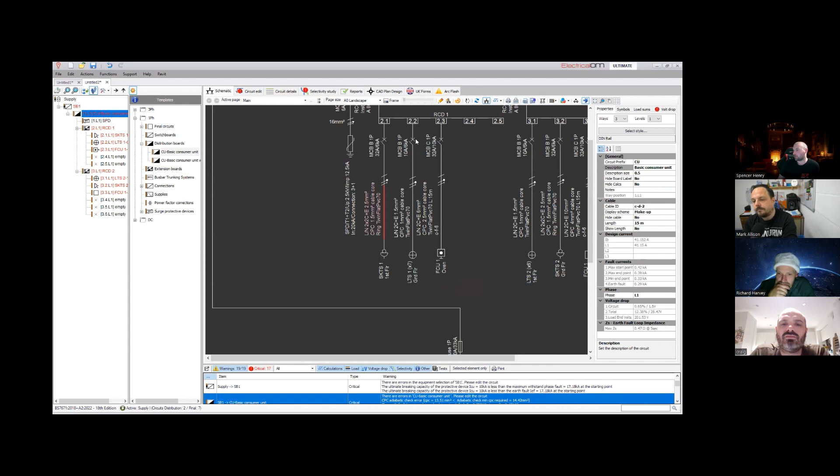So here's one I made earlier. I've added in a fuse board. It's got a fuse on there. I've got some ways, a split load board. You can see the two sides of the RCDs, those sorts of things. So you can pre-build lots of elements which are very common, and you can save those in the software and recall them anytime. So if you do common things like certain lighting circuits with certain types of cable, those sorts of details, we can add them in there.

That's really useful for us when we're adding solar PV onto systems, because sometimes they're going into additional consumer units rather than replacing the whole house one. So you can model that at a simple domestic level. That's a really good feature, actually. I wasn't aware you could do that, so that's news to me.

Yeah, there's lots of little things that are in there. I'm building at the moment a load of pre-made templates which are going to show up in the future. Basically, it'll be things like simple socket outlets, lighting, the most common installation methods you see out there for various types of location. There'll be some pre-built elements you can take and drop in quite quickly and place those details as you go.

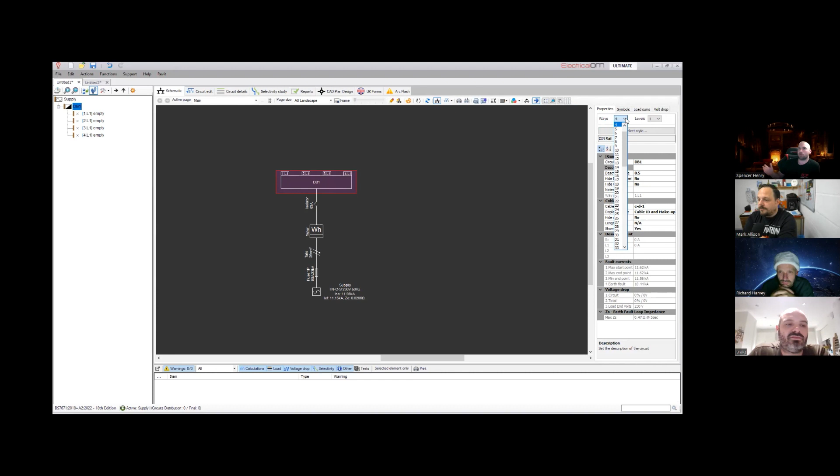So here I've got my board. Generally, if you're doing a board swap now, most properties, what are we looking at? Sort of 8, 12 way? 12 to 16 ways is typical. I think they're getting ever bigger. Let's put 12 in there. So I've added in 12 ways here.

Now it's saying currently L1, because on my supply it is just identified as L1. That's pretty standard. You might not know that information, to be honest. Leaving it as L1 or L2, whichever of the phases you want, on a single phase system it's not really going to affect much on our design. If you're looking at more modern properties being built now, generally they'll have 3-phase boards. It's becoming quite common, isn't it? With all the smart technology, but maybe that's for another day.

It's one of those where we're kind of between two places, aren't we? I think we're hoping PV and battery storage are going to save us from needing to go 3-phase in everyone's house. But we just had a property in a nearby town. They've got a 3-phase supply put in, domestic house. Yeah, I remember seeing a few things on LinkedIn. The guys over at eFix did a few videos where they were going into properties where these were going in. So it is happening out there.

It's all about this battery storage and prosumer and these sorts of things. We won't touch on that today, but we have already preempted a whole prosumer element going into here, which you're going to see coming next year. There's some real magic going on in there.

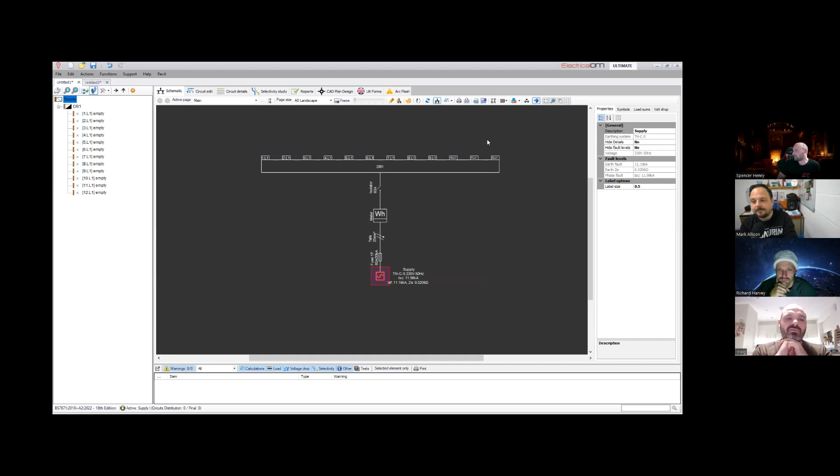Awesome. But here, I've got various things. So here I've got a basic isolator on the incomer. All these elements can be adjusted as we go. So for instance, this is a standard, probably going to be an 80 amp main fuse. And then you've got different AC types here in terms of the type of isolation. If you don't know what they are, we've got lots of really good information already pre-built in here.

So for instance, for this information icon here, we've gone into the standards. We've identified what they are and what they're being used for. So you can then make a judgment on what you need without having to go to a different standard all the time and pick out all this various information, keeping things as simple and concise as possible. So if you come across something you're not so sure about, you've got a reference to where you need to go to find that detail.

So I think this is part of that. It's only as good as what you get out, because if you start speccing the wrong things, that's what your guys are going to be ordering up and installing on site. And at the minute, there's no warnings on this, there's no errors. What you've done is not against regs, but you might be speccing the wrong equipment for your job on site if you're not looking at the right points. Yeah, exactly that.

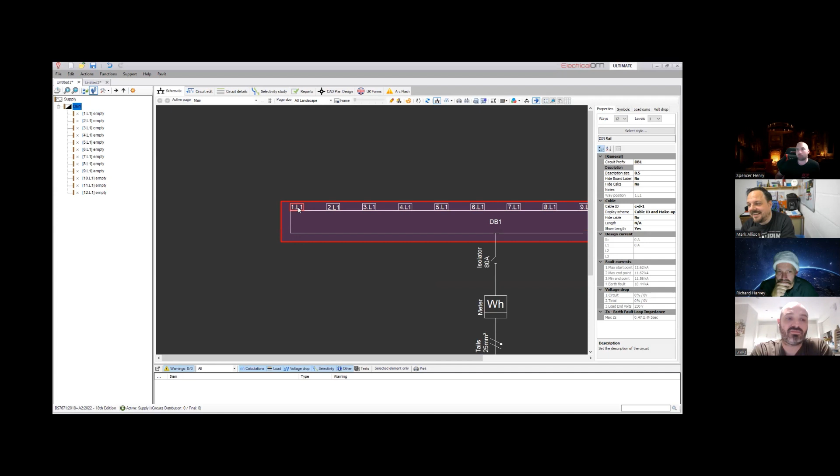So generally now, I'm going to go back to here. Often I think a lot of the first ways on the board now are taken up by SPDs, in anything modern. Yeah, that's fair. So again, just simple. You go in, drop an overvoltage protection in here. As you can see, it's just dropped an SPD on there.

I can tell it what the way is. I can add information around the cable. And again, this is all referencing stuff back to the regulations. So depending on the type, I'm assuming it's T1, T2 type for most domestic as a standard there. So we have pre-programmed some of the basic go-to points for these sorts of things. But it also spits out information relevant to particular types.

So if I select a cable like 2.5 with a 2.5, you see here it's going to pop in the fact that there's certain regulations that say actually you've undersized this. Go back, have a relook at it, and your warnings are popping up there. So everything is very much an interactive element. Every time you make a change, the software's going to tell you what's going on. Look at the calculations going through there. So I've added some details there.

And I pop this 6 amp MCB in there. Now, if I go to devices here, you can see I've got a 10kA device here, but it's telling me about 11kA here. And depending on the system that you're working on, that's going to make quite a big difference in terms of the size of devices, maybe even the manufacturer of devices that you're going to be selecting for that particular installation.

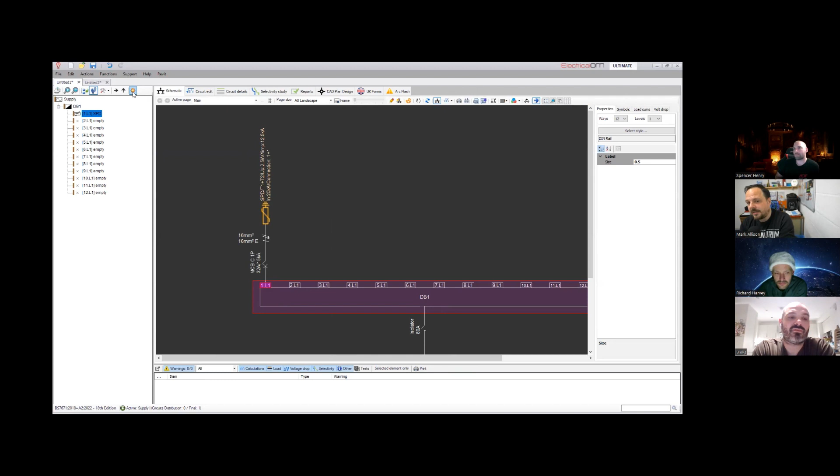Yeah, it's going to be bespoke to the area of industry you work in, isn't it? The templates, so it's totally different for everybody, really. Yeah. Something totally different that you would fit, maybe in the main intake of a hospital, than it would be for your domestic installation. So yeah, absolutely.

So we've got our SPD in there, and I can start dropping in circuits. I might start with something which we're all probably familiar with. I'm going to go for a final circuit here, and I'm going to make this something like a ring final circuit. Yeah, the good old ring final, love it. Good old ring final circuit.

And we could have that whole debate about whether or not it's needed these days. Is it valid? I'm in the camp of we really don't need them in domestic installations anymore, but that's a whole other can of worms for another day.

But rings are quite common. So here I'm going to drop in, and you can select for different kinds of circuit here. And depending on what we select here, it's going to affect how the software is behaving for its calculations. So when I do select a ring final circuit, all of my calculations are going to be based on a ring. You can see it's popped up this little bit of additional information here based upon the fact that this is now a ring final circuit.

And the software is also going to throw up a plethora of issues and errors because I've selected that to be a ring. You can see these little red warning markers popping up all over the place. So for instance, if I hover over this one, it's saying your phase conductor must have a CSA of 2.5 or 1.5 mm. That's the information we put in the software.

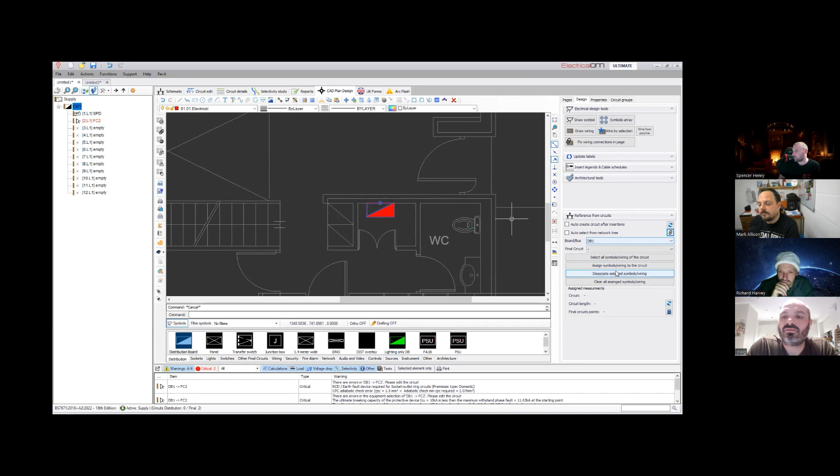So for instance, here, if I select this DB now, I'm going to say I want to link it with this DB1. I can assign it, and it will start adding references and details based upon what I've got selected in there. Now I'm going to drop in a new ring circuit on here. So I'm going to create a new circuit after dropping in.

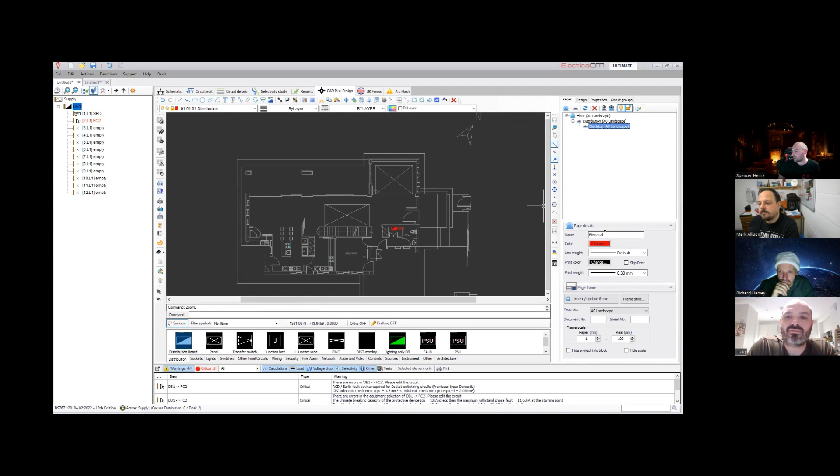I'm just going to give this a nice new CAD layer because we're in a CAD environment. So we're going to add it as a CAD. And I'm going to give it another color so we can see the differences on there. And the reason why I'm doing this is just to answer your question there, Craig, in terms of the lengths and how they calculate, because this is going to give us a nice visual representation of why we're calculating it in that way.

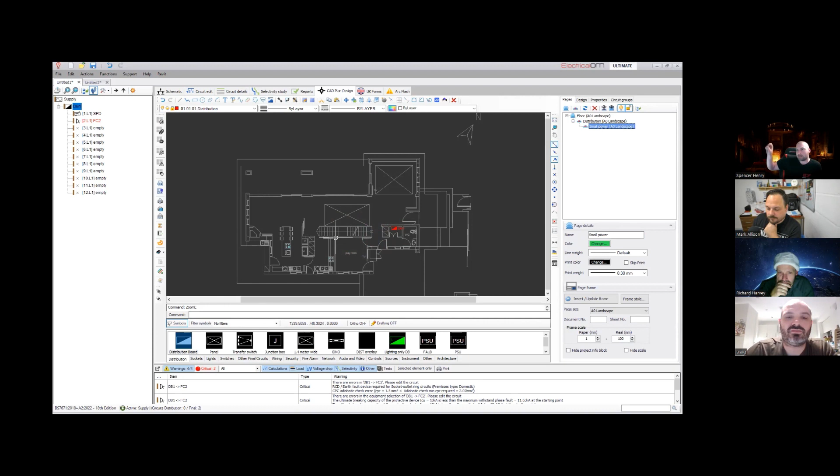So here, go to my sockets and grab a standard double socket outlet symbol here. And I can start dropping stuff around. I'm going to add in the wiring. And in this case, I can give the wiring things like an elevation. So when it goes up to the board, it goes down to my outlets. I can set the wiring, how high I want it to go. So for instance, in most domestic properties, floor to ceiling is usually about 2.75 meters, which I think is pretty standard for building. So I'm going to put in 2.75 in here.

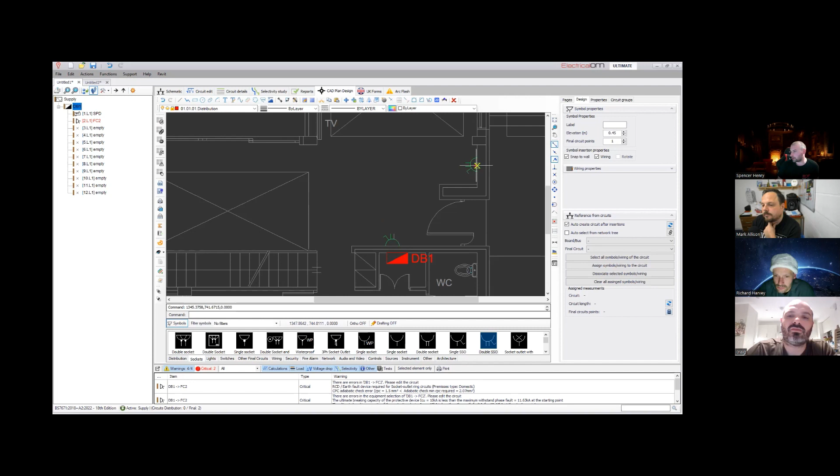So I've added that information. And on the symbol here, I've already put in the elevation. Currently, this is set at 400. It needs to be 450. So that's your standard socket height. And I can start dropping in things like sockets here on this drawing now. So for instance, we'll drop one here. It'll add the wires in as the crow flies. And it's just a simple drop in wherever I want to put a socket outlet. You see it's adding those wires as I go. So I'm just going to finish that off.

Give this one, let's call it SKTS 2, call it general power. And again, I'm going to leave it as a ring outlet. I can say how many watts per point. So depending on your location in the building or in a property, you're going to want to change this. So for instance, for something like a kitchen, 200 watts per point is probably a pretty good amount, because you're going to be using a lot of high usage equipment, things like kettles and toasters. Whereas in something like a bedroom or even the lounge, you're not going to be drawing that much power. So I might cut that down to around 50 watts.

If you're upstairs in Neil Bridgman's house, he's got them set to 1 watt, I think.

Yeah, a lot of the time you see with design, another thing with ring final circuits, I see people do a lot. They put in the current for usage on it as 32 amps. And then they wonder why their system's completely overloaded. You go into even your own houses now, if you put most of the stuff on in your house simultaneously and put a clamp meter around your incoming supply, I will be surprised if you're pulling more than 16 amps, absolute worst case scenario. That's a hell of a lot, really.

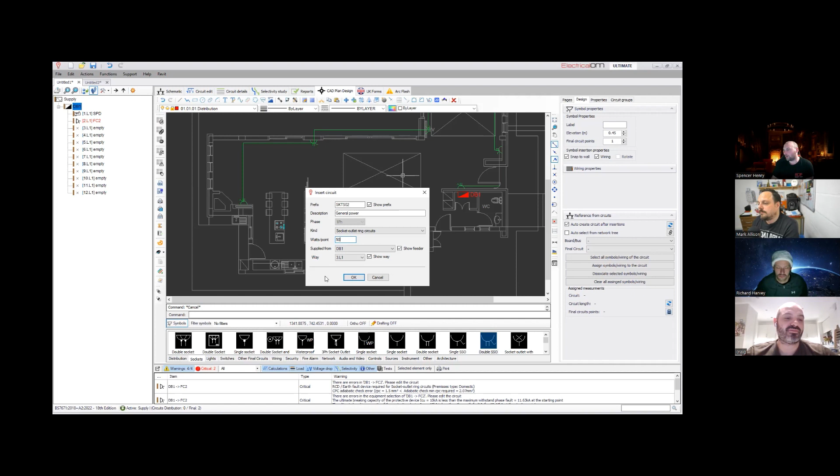So I'll put in here about 50 watts a point. I'm going to hit OK here. And what's this going to do? It's just going to create me a whole new circuit in my schematic. So this is one of the ways we help speed up design for people. If you've got things like floor plans, as you're drawing your floor plans, the software is building your design up in the background. So you can see it's added the socket, it's added how many sockets I had.

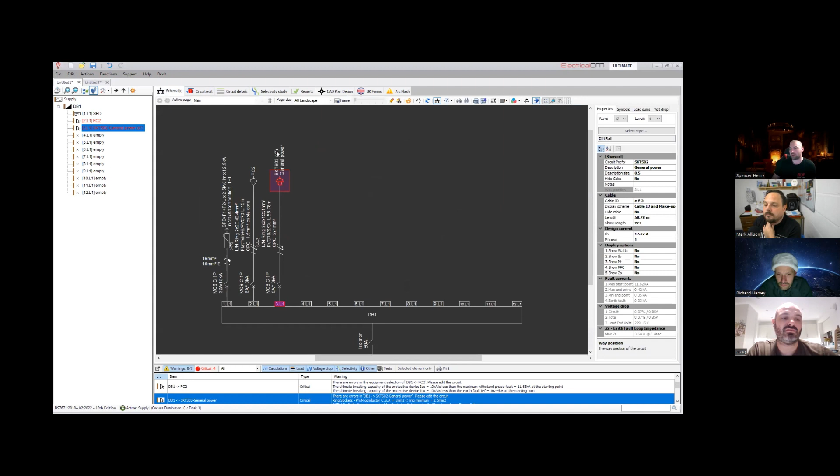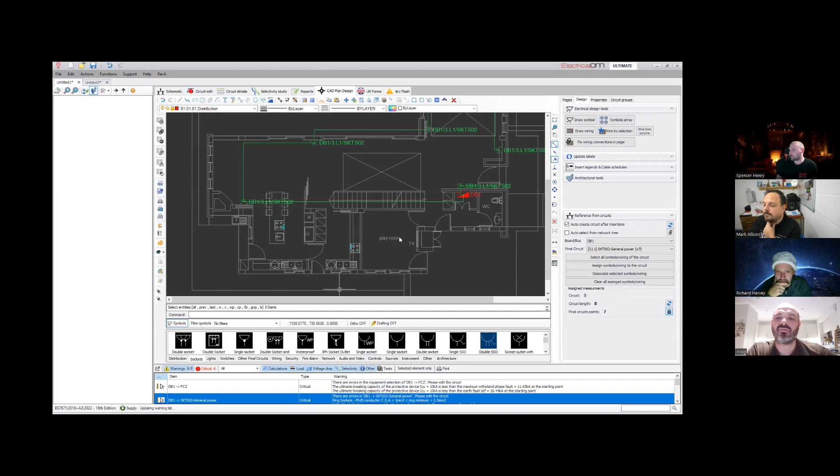If I go in here, it's going to tell me currently I've got 58 meters of cable, because it's a scale drawing of the location. Like I say, it's all about taking out the heavy load. I've got points here. You can see the wires going from one to here, but I haven't gone yet to the board. So I'm just going to quickly connect those wires back to my board here. So you can see I've got my full ring now, goes around this. So that's bringing me to about 80.45 meters in total, about an 80-meter ring for this location.

And if I want to see how that's being calculated, we do have these little fun tools like the 3D view here. So you can see the height of my outlets. You can see my board, which I'd already preset previously, at about 1.44 meters, which is pretty much the standard for, you know, still approved. Is it still Document M? It is, yeah. You'll see it in there.

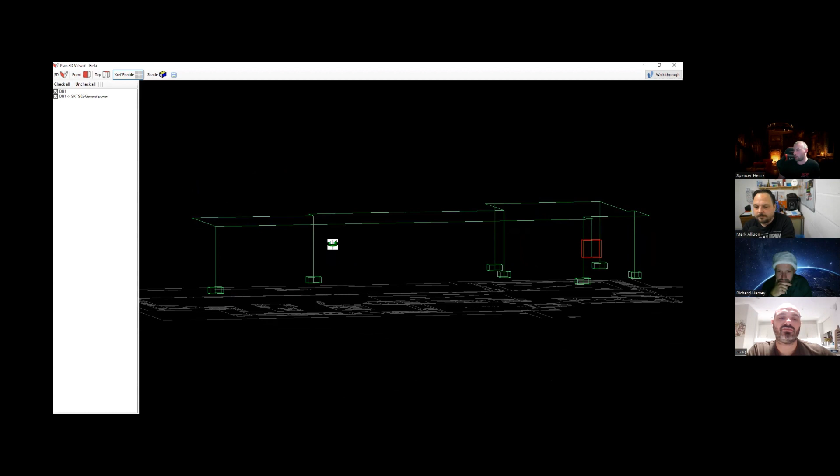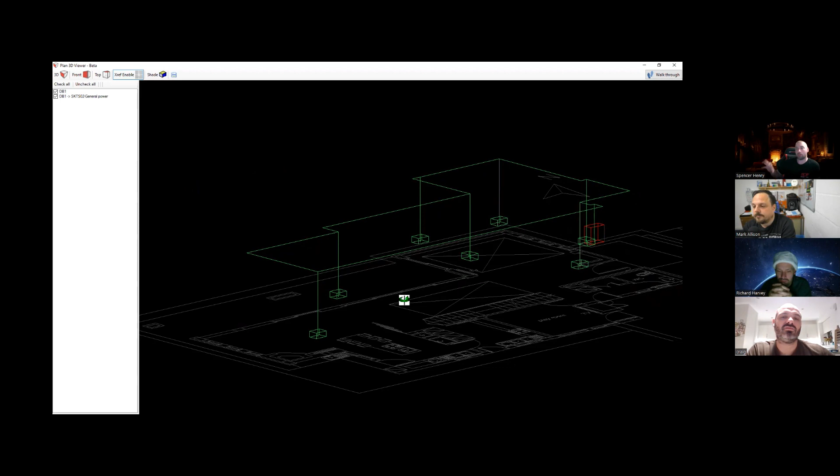And then we've got our socket outlets, which I set at 450, and you can see the route the wiring's taken here on the 3D model. So it's going down to the outlets, coming back up, then it's moving along. And I've done this automated, so it's dropping the wires in as I go, but I could have moved the wires around and gone with a specific route. So if I need to get around some steelwork, or around somebody else's work in the property, like pipes for your other services, you've got that customization available there.

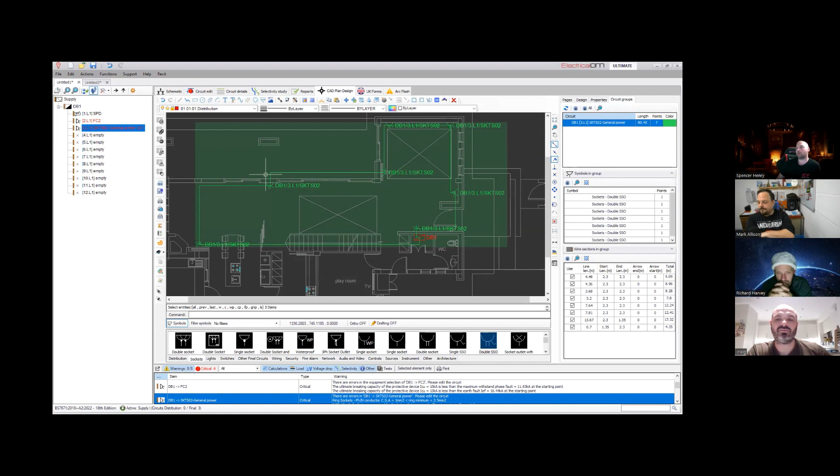So I can see there how it's being calculated from one to the other. And I can even go a little bit further than that. So here we've got this group's information. And I can see for this ring which length I'm going to be. As you see, our length is calculated going from the board out to our outlet, onto our next one, onto our next one, and it's going the full distance of the ring from the board all the way around, back down, and that's what we're looking at for our calculations there.

So going into here, we can see I've got this information in terms of the detail here. And also we've got a little bit of calculation information just below that. You can see I've got my 50 watts a point. We've got things like a cosine of theta here, which is power factor. Have we got any power factors?

Things like your power factor, it all comes down to the equipment that you're putting in. If you know your equipment, 9 times out of 10 the manufacturer will have that information in the data you're being supplied with. So in a domestic location, you're going to be looking at things like your microwave and your oven. They're going to have power factors on there, and it will be contained in the manufacturer's details.

So you can just drop that information in, and it does have an effect on things like our design currents going through them. So I'm going to tell you a little bit now about how this information is going to relate to some of the stuff you did probably in some of the other videos around the design.

So up here, we have things like our volt drop. This particular box is just telling me the volt drop for this particular circuit. So where I've got this distribution board that we put in, what's my volt drop from this distribution board to the furthest point on this ring circuit that we've currently done? What's my overall volt drop to there?

We've also got next to it the total volt drop from the supply. So currently my whole voltage drop from my supply all the way to the end of the circuit is around 1.717 volts. But this individual circuit is only 0.51 volts. So we can see that staging as it goes up there. That's really useful for learners, and even the picture as well.

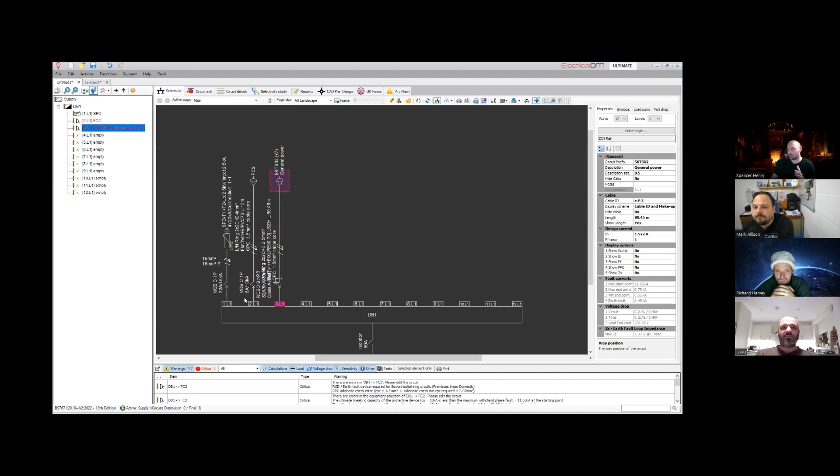I'm going to go back to my supply and I'm just going to adjust the values down slightly. It is a bit cheating. So for instance, I'm going to drop these to 9kA so I can use my 10kA devices.

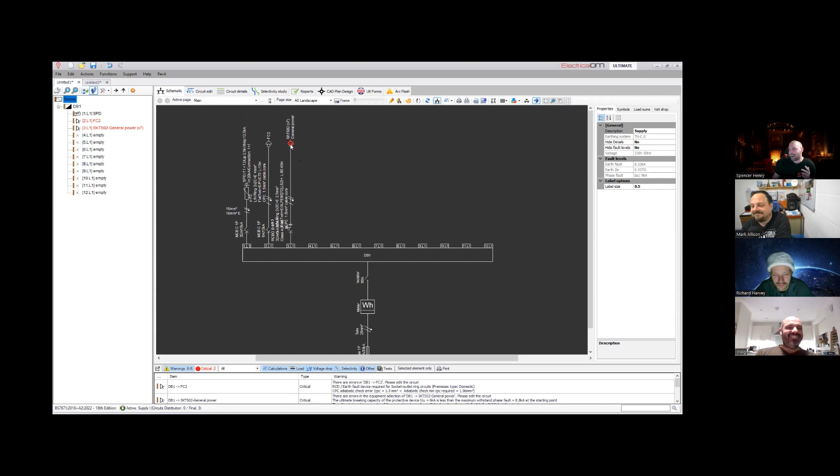I don't know about you, Mark, but I've never done this. Have you? No, never. Never done that. I get this. We're making this up as we go along. So we've not got something we can go and compare results with on a site. We can't go and test something to say, right, this is our installation. We're just pulling it together here. Yeah, don't do that in the real world.

But here now, if we go through, as you can see, my kA ratings have now dropped quite considerably. I can see at my protective device now I've got a much lower fault level available. So, these go in there.

I added that information. Currently, I've only got a 6kA device here, and I need to have at least a higher figure, so I can go now. You can see here we've got my 10kA. So earlier on, all of these were red. So again, the software is just giving us little hints to say, look, if you select this device, it's not going to comply. You're still going to fail this check.

Here I'm going to go for 10kA. They're mostly doing Type Cs now in these domestic boards. Are they still doing Type Bs? Type Bs mainly in the domestic boards still. Type B, drop a Type B in there.

I will say, again, with all these things like heat pumps going in, brush up on your types, because it's quite important in terms of how that curve behaves in relation to the amount of current, particularly things like startup currents and those sorts of details. We probably won't look at that too much today. Maybe we can follow it up on another podcast.

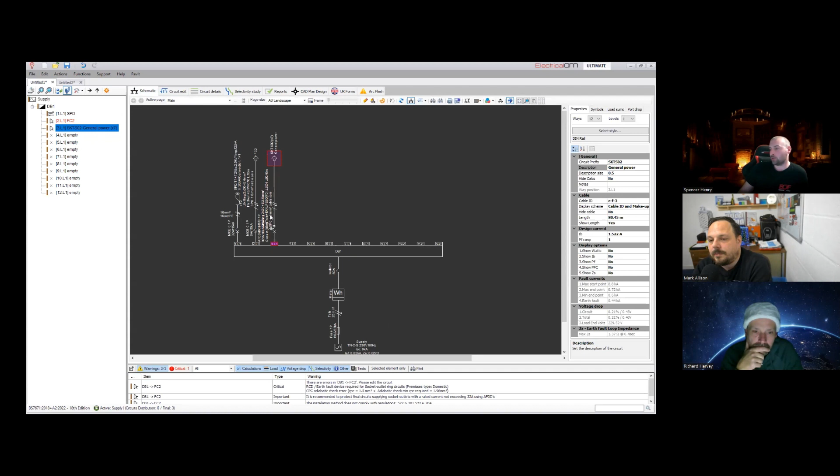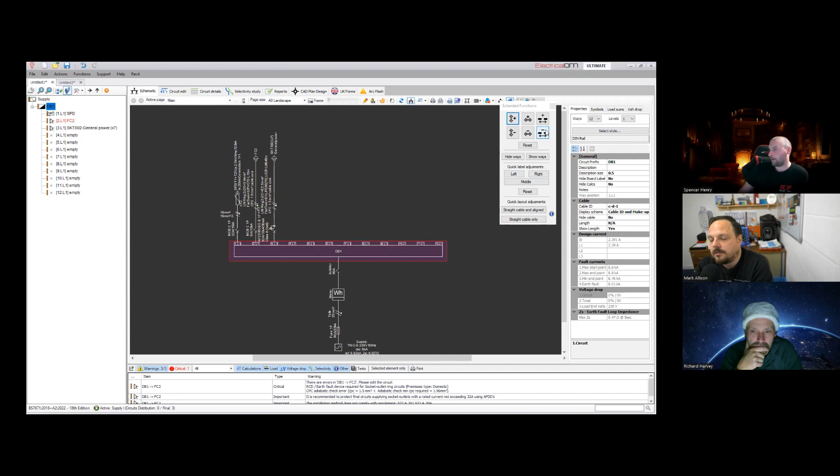It's a little bit messy in terms of the level of information. So I can move this around. We are working in a CAD environment here. So if I want to move something, I can do that. Fantastic. Move things around, and we've got lots here. If I haven't got enough space in here for all this detail, it is a bit clustered there. I'm just gonna give myself a bit more space there, and spread things out, stretch it, make it smaller.

There's so much customization to add, and we try and keep the CAD tools relatively simple as well. You'll also notice things like my symbols. When I selected socket kind, it's changed my symbol relevant to the socket. Again, it's customizable. You can choose your own and make your own default details there as well. But we do have a lot of basics in there, which are built upon standards. So there's actually a British standard, an IEC standard for symbology in these kinds of drawings, and we've taken all that and placed it in here.

It's very out of date. Last time it was updated was in the 1960s. Yeah, but if it ain't broke, don't fix it. We all know what these things look like, don't we, on these designs? You say that, but take a look at the things coming onto market now. We've got no standard symbology for an EV system, or those sorts of battery storage systems, or photovoltaic panels. We've got some things that people have made up and common terminology with inverters.

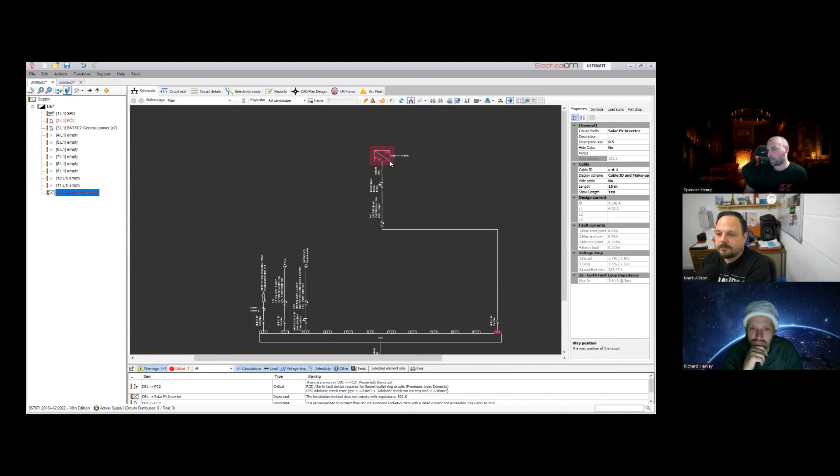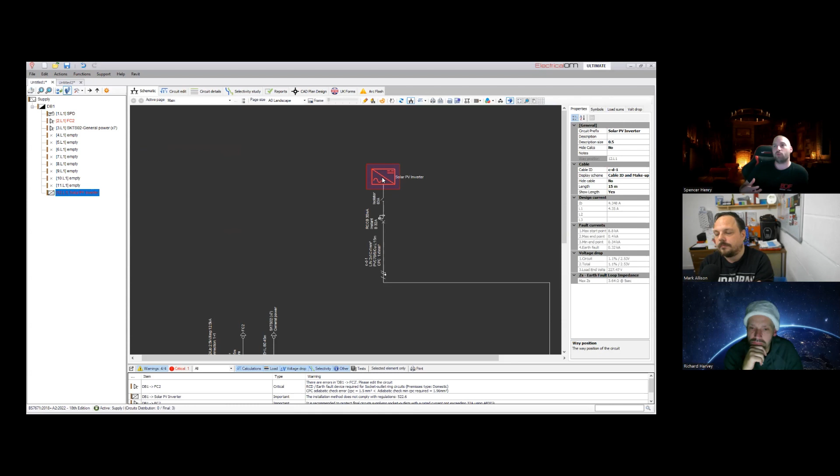So for instance, I'll just drop in, while we're at it, things like a solar inverter. So here I've got an inverter, an AC rectifier, solar PV inverter. So we've added some details in here. You can see we're going from DC to AC. Relatively standard, simple. And that's really been derived from things that people have been using for UPSs and those sorts of things. Same effective principle in reality. But yeah, it's those sorts of symbols that people are falling back on because they're pre-existing. That's really good.

I'm just conscious of the time, so we've kind of reached the hour limit where I think lots of people will be tuning out. So if you're happy to come back and delve into some of this in more detail, that would be incredible. But I appreciate your time is a finite resource, so don't commit to anything you're not happy to do. But if you could just very quickly share the certificates and how that links across to the design, because I think people would be interested in that, definitely at a domestic level and apprentices. So does this link over into the cert pack?

Yeah, so there's certification which is built in. It all comes through on mobile as well, so you can send all this out to a mobile device and fill out your test results. Also, if you are going to an installation you've never been to before, if you create something from blank in our mobile app and send it to the software, it will reverse engineer your design and schematic from the test results and the details you brought in, because everything's calculable.

Oh, so wicked. Yeah, everything goes bi-directionally within the software. So if I've got existing data on a test certificate, I can load it in here and it'll produce a schematic? I didn't know it would do it that way around. You wouldn't do it directly here in the UK forms, you do it in the mobile app. You build it all up in the mobile app basically like you were building up an EICR or an installation certificate, and it will reverse engineer everything, and take things like the R1 plus R2 values and calculate things like the circuit length based on that detail.

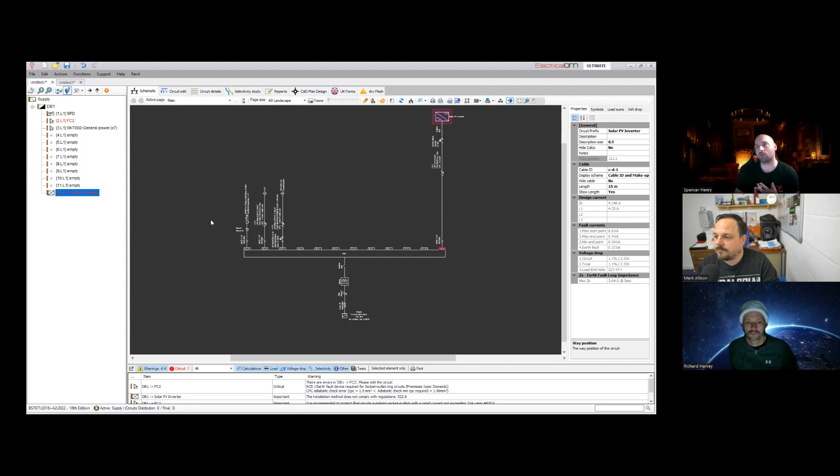There are some really good videos online. Like, say, we've got the learning and training channel, which basically goes through all the basics of the software. How do you create a supply? How do you do a distribution board? What are the differences between a few different connection types? How can you go through design? I touched on some of these elements here in terms of the active values. I'll go into a lot more depth in these. I'll talk through them one by one in the video so you can understand what that information is, where it relates to, how it connects to the design.

Like I said, the knowledge base is really good in terms of the information. Got a guy, Mert, in the office. He produces a lot of that stuff on the knowledge base, and he's absolutely top notch in terms of that detail and information. And as this is for things like apprentices and those sorts of things, talk to your colleges.

ElectricalOM provides the software to colleges and training providers absolutely free. As many licenses as they require to give people learning about design and those sorts of things the opportunity to actually use software that's being used out there in the marketplace. Because at the end of the day, if you move on and you go to a firm or a company where you're expected to design, you'll be using something like this. You'll rarely be asked to do something pen and paper these days.

But don't dismiss sitting down and doing it pen and paper from time to time, just to reassert and affirm, and even just to check that the results coming in and out are what you expect them to be. That's an important piece of engineering ability and judgment, to understand what you're getting and have confidence in what you're doing. So absolutely play around with it, try it, try and break it.

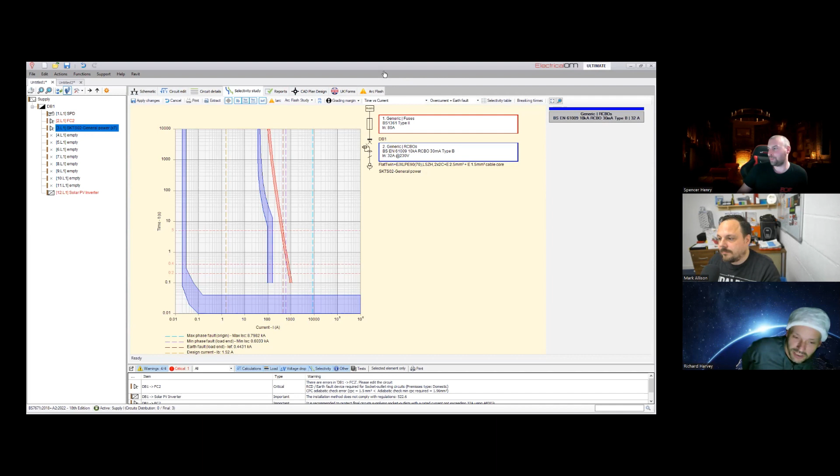I love the way that you can create wiring diagrams and illustrations of the installation method and the individual legs of the ring and all that. This would have been a godsend when I was delivering the hotel project on the old apprenticeship framework, where they had to design a number of circuits, and it was all done by hand. We still have the stencils to draw out all the symbols that, as you say, haven't been updated since 1960, etc.

But what a great piece of kit, and fair play to you for giving licenses out to training providers and colleges. More manufacturers need to be like yourselves, forward thinking. And you know what? If they're likely to use it during their time, then they're likely to use it when they qualify and maybe set up their own companies. Hopefully we can do more work with more manufacturers in the future to do the great work that you've done there. I'm looking forward to the next one.

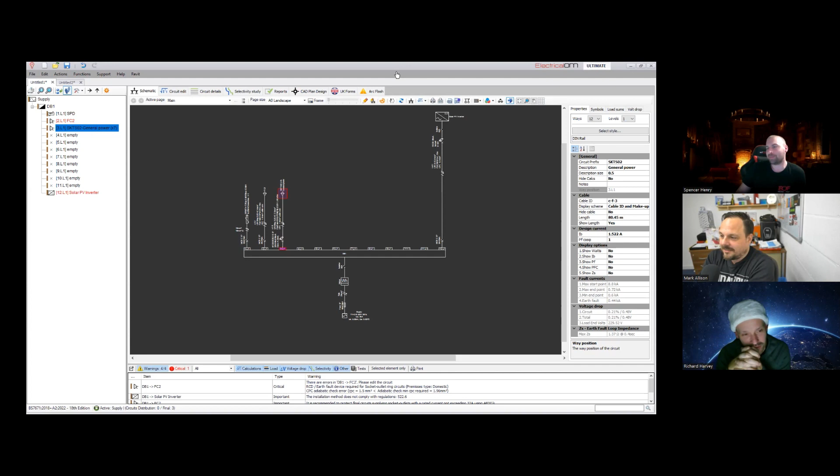I've kept in the background, and I've just been trying to keep up with everything you've been doing because, gosh, the options are never ending, aren't they? What a great piece of kit. Yeah. I'm looking forward to having another go, getting a bit more involved. Yeah, brilliant. Absolutely love it. Steep learning curve with that product.

I know Jamie, one of the other hosts of the podcast in the past, wanted to come on as well, because he's really keen to pick up OM and start using it himself in his day job. I think there's lots of people who have gone on that journey with software. It was probably 4 or 5 years ago when I started looking at using software for some bigger systems we were designing.

I think a lot of electricians are going to be on that path anyway because of the introduction of PV, EV, and all these things. Even at a domestic level now, installations are getting more and more complex. So just having something of an oversight to count and measure the mistakes you could make. If you're a small contracting business and it's just yourself as the designer, having a bit of software to help you, I think, is a great thing.